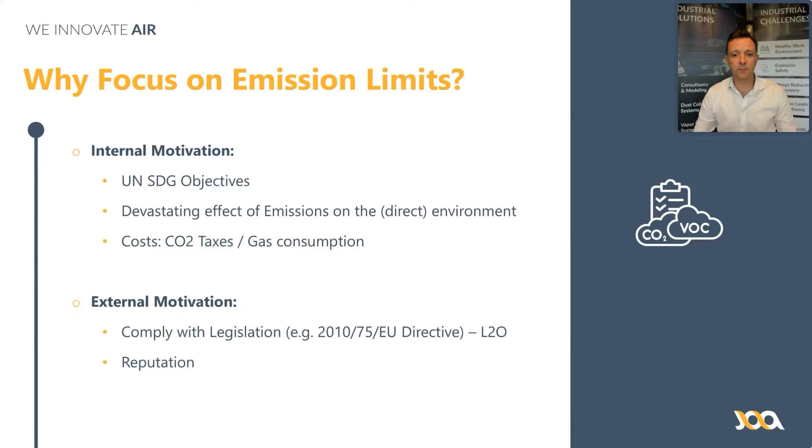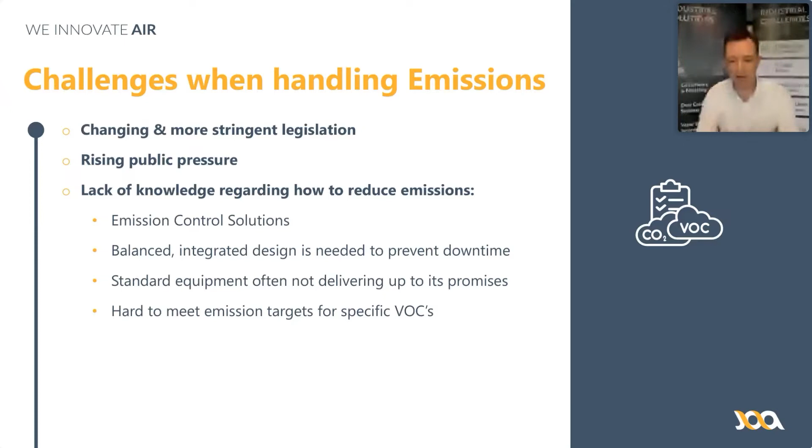In the last couple of years, we see a rising interest of the public audience in Fortune 500 companies. What are they doing? How are they addressing their emission control? And how do they communicate about it? So, what are the challenges? First, changing and more stringent legislation. As I mentioned before, rising public pressure, and also challenges are often a lack of knowledge of the available solutions and how we can create a balanced and integrated design. Often current standard equipment is not sufficient to address the volatile organic compounds or dust, and some targets are hard to meet.

Besides specific emission control, it's also often a challenge to create a link to related challenges, and if you can create a successful link, the business case gets much more positive. Let me give you some examples. Can we improve emission control outside together with an improved working environment for your operators? Can we combine it with an upgrade in explosion safety? Can we recover energy while addressing emissions? Can we improve processes? Can we reduce waste? Currently the prices of raw materials are increasing, so can we reduce waste concerning those raw materials? Some examples of how to create a holistic approach while addressing emission control.

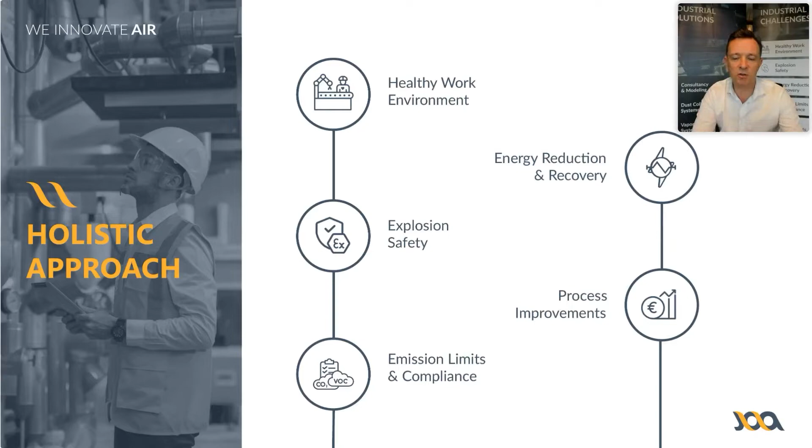How to handle these? Well, first, let me discuss the approach. In our opinion, the best approach is always data-driven. Do you have measurements available? If not, which measurements need to be done? Where and how? The second step is, can we validate those and can we model so that we can predict future outcomes? At a high level, we always address 3 steps in our solution approach. First, it's best to eliminate the sources. How can we prevent emissions? That's always the biggest win. If we're not able to prevent emissions, can we extract them as well and as effectively as we can? Can we create a perfect extraction close to the source?

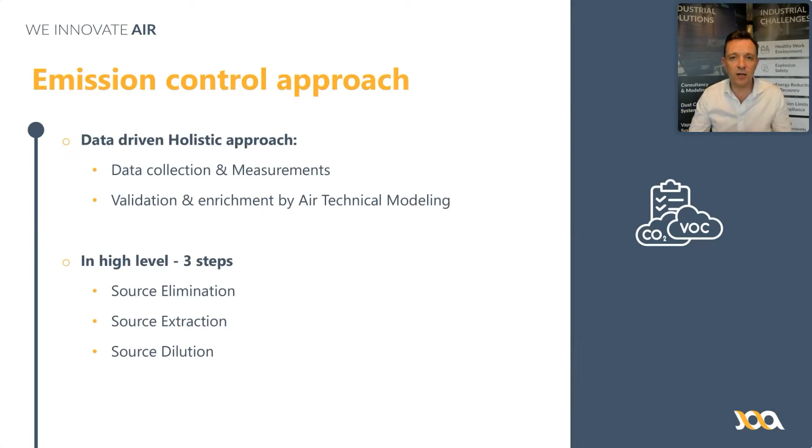And last but not least, in the third step, if we have done so and created the optimum, particles are getting smaller and it gets more expensive to create the perfect extraction. That's a thin balance. Then we start diluting, adding some extra air to dilute the concentrations. Those 3 steps are always central in addressing emissions.

Let me walk you through our approach, how we address them. As a start, we will always work from data, so measurement is key. Then we will model the data with an air technical model to predict future outcomes. We have developed our own technical model over 2 decades, and also incorporated a lot of industry knowledge in that modeling. And third, based on that modeling, we will start engineering and then building the solutions.

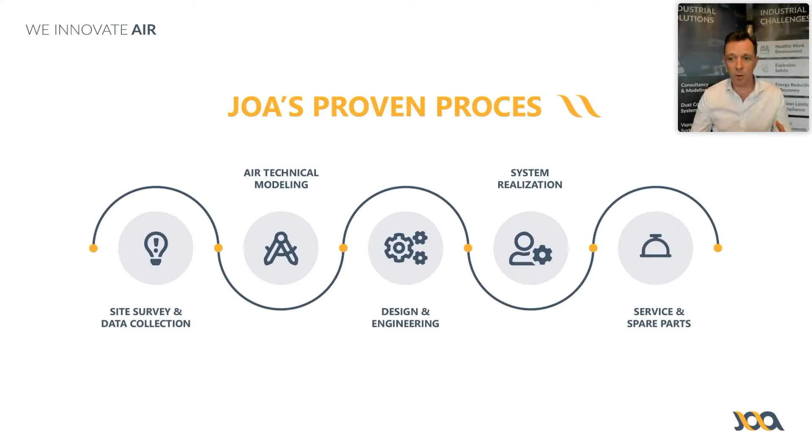So when we have done the modeling and the pre-engineering, we look into how we can apply that in a technical solution. Let me walk you through the steps. It will be high level.

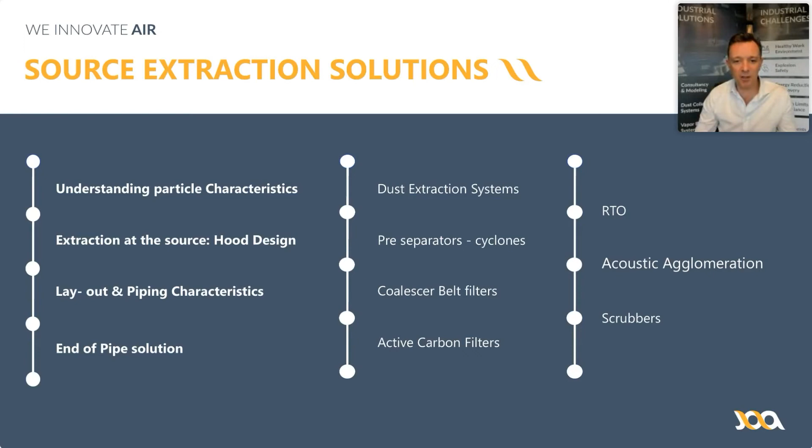And last but not least, scrubbing: how to address the dust or the vapors with a scrubber. These are, again, examples of technologies which are often used in combination to perform effective emission control. As I mentioned before, we advise you to have a holistic view on emission control and other related angles on particles, because there's often some success to be found.

So I'll give you an example of how we apply technology with the holistic view, combining emission control and, in this case, energy recovery. We have developed an energy recovery scrubber. Overall, it's very effective. It uses the least amount of water or solvent. We will always look into the right liquid to gas ratio, and also, as I mentioned, how can we recover energy?

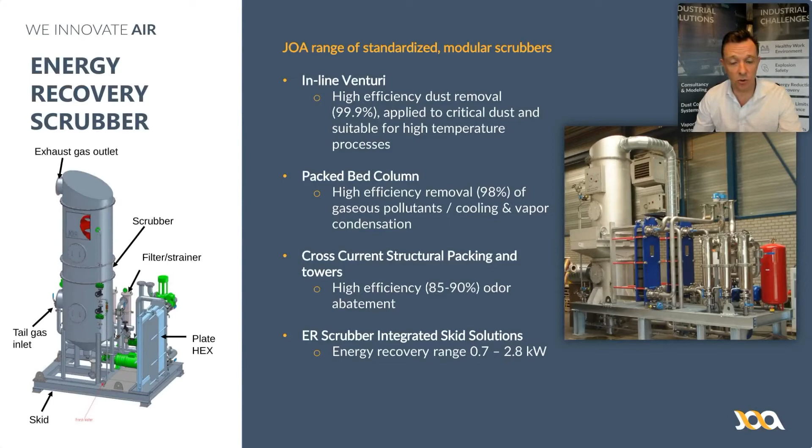It focuses not only on the sensible heat, but especially with scrubbing, you can also recover energy from the latent heat. And there's a lot of energy stored in there. While you recover the energy, of course, the scrubbing needs to do the most important thing: address your emission control. That's the topic of today. Then how can we combine it and bring it to the consumer on your side? Because now I'm talking about the producer of the energy.

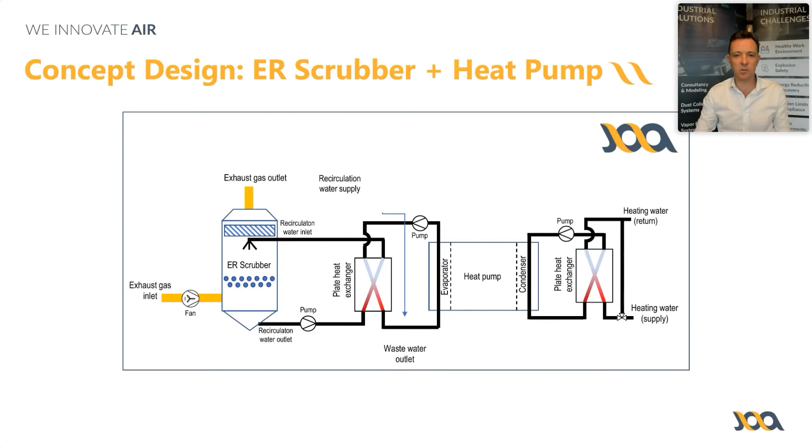Here you see a setup we often apply in practice, for example, with a heat pump, where we upgrade the heat to the right consumer range. This is just an example of how to combine emission control with energy recovery. As I mentioned in the beginning, let me walk you through some case studies we've done in fast-moving consumer goods, food, and also in the chemical industry.

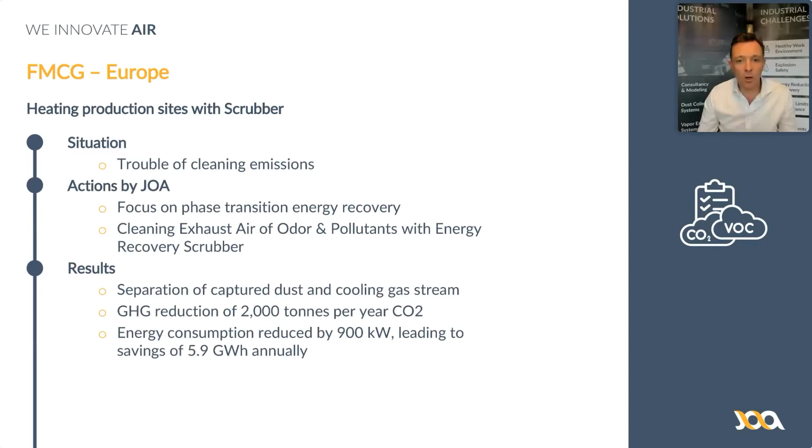The first example is that we address emissions, specifically VOC, but also odor, together with energy recovery, as I discussed, based on the energy recovery scrubber. The potential is huge, especially in the latent heat area, where we can bring the temperature further down at the dew point and release a lot of energy there. Here you see the reduction both from a kilowatts point of view and a CO2 point of view. This was done in the food industry.

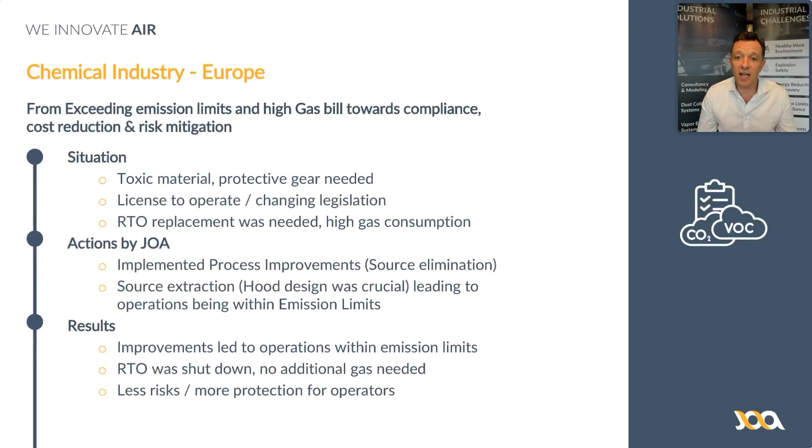So I hope I gave you a great overview of emission control and how to use it in combination with other industrial challenges to potentially create a good business case, and also gave you an idea of the technical solutions and availabilities out there to address your specific problem.